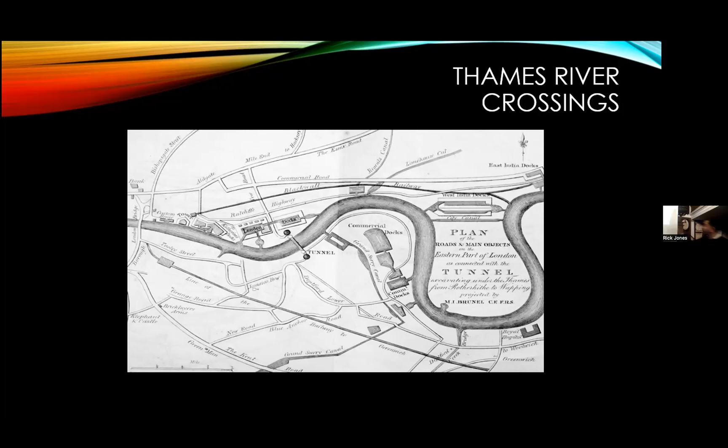Now, sorry, this picture. You can see how congested it was. So something had to be done. Now, this is Marc Brunel, and Isambard is his middle name. Marc Brunel was actually a world-famous engineer in his own right. Nowadays, everyone remembers Isambard because he did significantly more during the Victorian era.

Now, Marc Brunel was a royalist. And during his lifetime, he escaped from France because people were chopping heads off for being a royalist. So he escaped to America. And while he was in America, he became the chief engineer of New York City. Then he eventually came back to Britain and started working for the Admiralty.

And he was one of the first creators of the production line. The Admiralty had loads of ships, and the ships needed wooden blocks to hoist the sails up. At that time, it was very expensive to build these wooden blocks because they needed skilled laborers. So Marc Brunel came up with an idea of how you can use unskilled laborers to make the wooden blocks, and then at the final stage, a skilled laborer checks the quality and makes any adjustments. That saved a huge amount of money for the Navy.

He also invented army boots because he realized the army boots the British were using weren't good enough, and he made his fortune doing that as well. So where did Marc Brunel get his idea from? He got it from this. It's called a shipworm, and the name is a bit of a misnomer. It's not actually a worm at all. It's a clam. Anywhere in the world, especially in the tropics, these worms are known to sink ships and destroy piers.

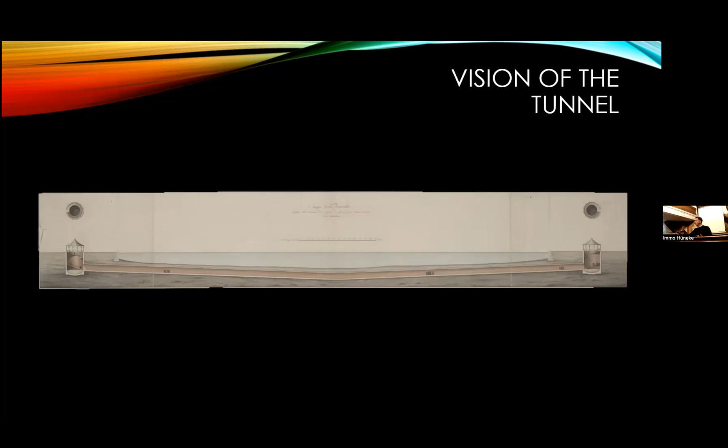If you look at the previous plan, you can see how close the river is. So digging under the river is always going to be problematic. If you ever go to the beach and you put your foot in the sand, you lift your foot up, the side slopes, the water comes in. That's the problem they had here. So using the normal shoring up with wooden platforms is not going to work. So what they ended up doing was they created this ingenious thing, which is called the main chamber. But what it really is, is a giant pastry cutter. During the pandemic, a lot of people have been baking cakes, so that's why I use the analogy.

So the bricks weren't actually created there. There was no direct digging. What they did was they built the cylinder at street level. It's 50 foot in diameter. They put a metal ring at the bottom. The metal ring on its own weighed 25 tons. They put another metal ring on top, another 25 tons, and they put a steam engine to pump the water out. And the whole contraption weighed 1,000 tons. And they let it sink by gravity. So there's no direct digging.

Now, even though Marc Brunel started the project, Isambard took over. Isambard took over incidentally, because there was supposed to be another engineer, but that engineer fell ill. So Isambard took over when he was only 19 years old. And you can imagine what 19-year-olds are doing today. They're probably updating their socials, not building tunnels under the river.

And when Isambard took over, one of the things he noticed was that since there was no direct control of how quickly the shaft sinks, some days it sank by inches, other days it wouldn't sink at all. One instance, it didn't move at all for days. So Brunel instructed the bricklayers to put another 8,000 loose bricks on top. Similar to what you do at home: if you can't get the pastry cutter to cut through the pastry, just give it a bit more oomph. Nothing happened. He then said, let's go all out. Let's put another 50,000 loose bricks on top. Let's not mess around. Again, the chamber was steadfast, didn't move at all.

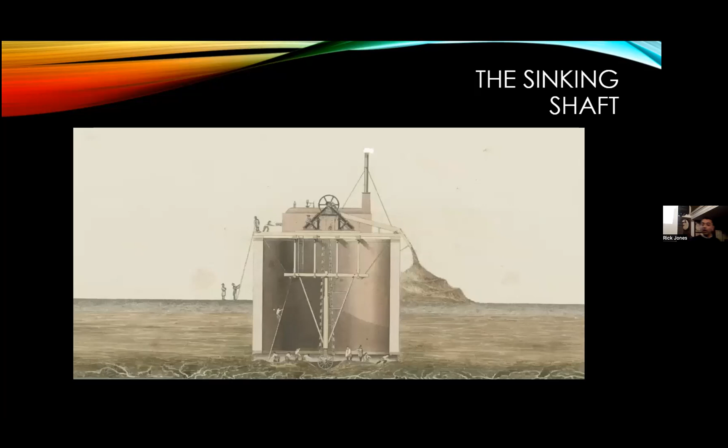Now, this actually shows the tunneling happening. So once the chamber, actually, if I go one slide back, once the chamber had been sunk to the required level, they built the floor. They actually built a reservoir to capture any rainwater and obviously cope with the water table in there. And then they lowered the shield in sections and started digging through towards the river. You can see the shield in situ and the bricklayers working.

Now, the more observant would notice there were no animals used. And the reason why no animals were used is because in the 19th century, the River Thames was the biggest open sewer in the world. Okay, and as people come across the big stink, yeah, so this is when parliamentarians can get their butts in gear and do something quickly.

In 18 days, they passed a bill to build a pumping station to get the sewage out, because in the late 19th century, there was so much heat in London, hardly any rain, the riverbed went really low, and the parliamentarians couldn't even work. And there was a plan to actually move Parliament to Hampton Court Palace, but that didn't happen. So you can imagine what working conditions were like.

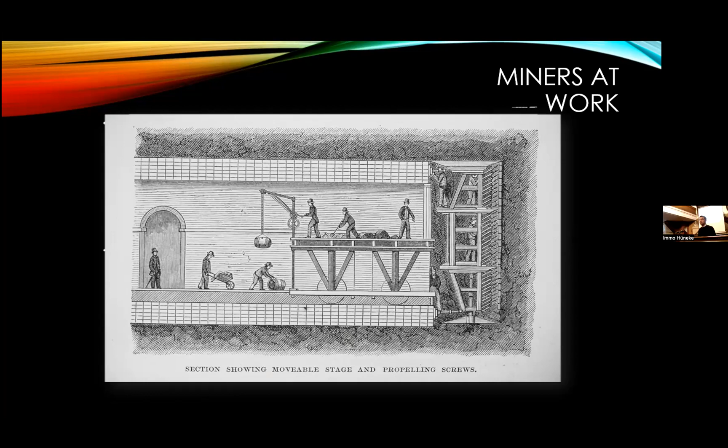The workers themselves did 2-hour shifts. Even the engineers who would go down just to investigate the progress of the work would also fall ill after like 20 minutes because the fumes were toxic. So no animals would actually survive down there. Okay, so that's why no animals were used. So everything was done by manual labor. So you can imagine how harsh the conditions were.

Now, obviously there was flooding. Okay, the first flood happened in 1827, 2 years after the building started. One of the bricklayers noticed that while he was working, there was a lot of seepage coming in. And this was a surprise to the engineers, because before they'd started digging, the engineers did some test boreholes across the River Thames. And what they were supposed to get was 15 foot of mud. Now, mud is waterproof. But what they instead got was shingle. And shingle leaks like a sieve.

And this particular flooding almost took Isambard's life. Because Isambard went to investigate to understand why the leak was happening, and the tunnel breached. Water came gushing in, and you can imagine both tunnels being flooded, including the main chamber, full of sewage water. Isambard wasn't able to escape using the normal route to get out, the platforms collapsed, and his foot got caught in the scaffolding. But the torrent of water was so severe, it pushed him out.

And he got pushed through the tunnels into the main chamber, and he was actually rescued from the original tiny door that led to the main chamber by a worker who was going past. Now, it could have been any of the other workers there, but it was actually Isambard, this sort of body floating at the top. He was dragged out, and he was described as being half alive and half dead. Now, he went to recuperate in Brighton, and then eventually in Bristol, where he got involved in the design of the Clifton Suspension Bridge.

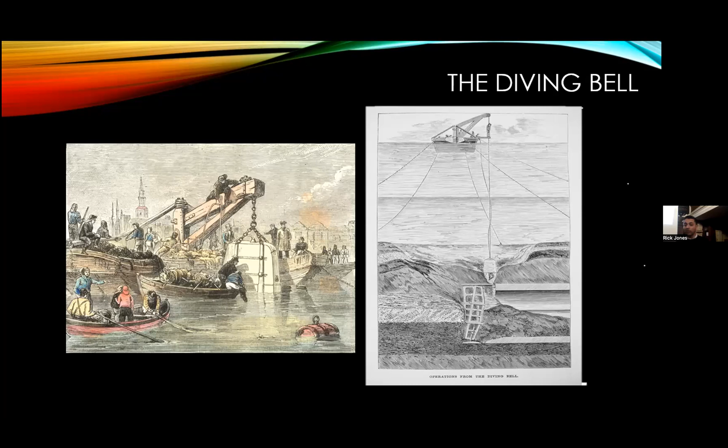They will investigate, then they will pump the water out, clean the slurry, let it dry, and then continue the work. So months and months of delays at huge expense. And that's why the tunnels, not surprisingly, took 18 years to finish. And you can see on the left-hand side, this is a better picture of where they've used mud sacks to support it. And there is actually a guy there on a little boat going in to inspect the damage. There were 5 major floods and smaller leaks in between.

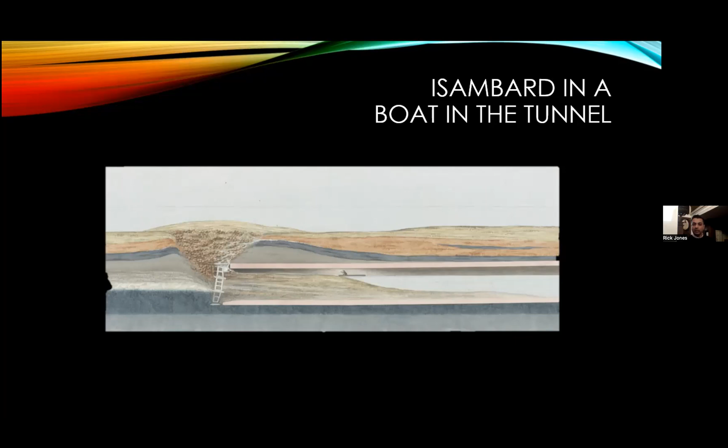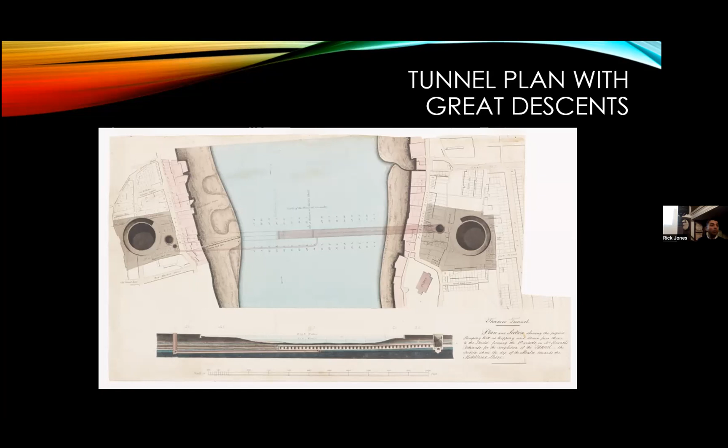Okay. Now, this shows one of the plans when the tunnels were boarded up because they ran out of money. So there's 7 years where no work was being done at all. They got to about 2/3 of the way and then had to essentially give up. And they had to try to raise more money because the tunneling company was almost bankrupt. And to raise money, they did this. They had a banquet to show people that the tunnels were safe.

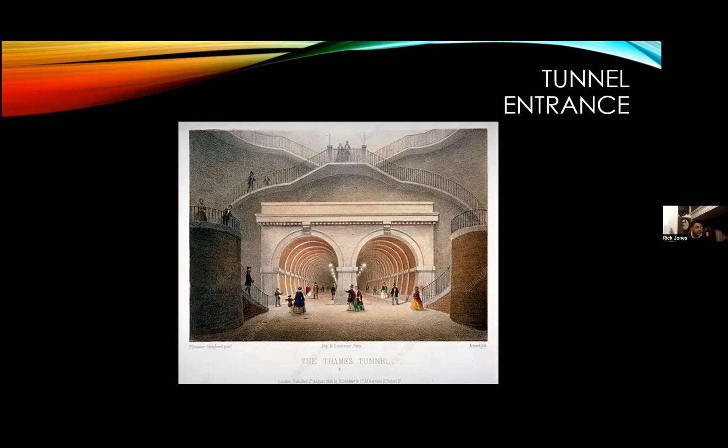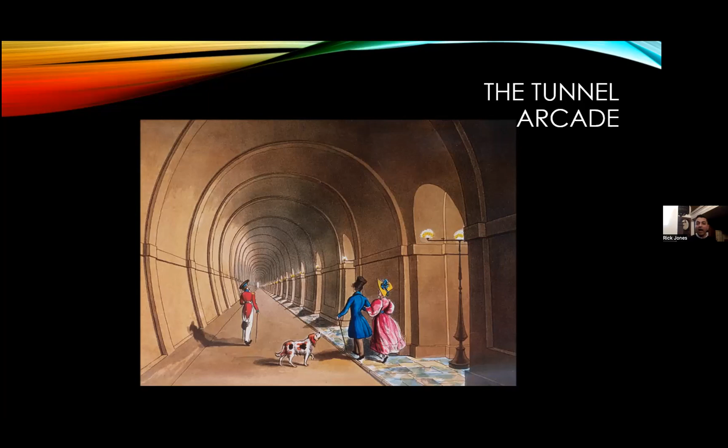Now, at that time, traveling was very expensive. So only the rich and wealthy got to travel. So in the tunnels themselves, they actually had hung murals of paintings. They had the Bay of Naples, Dover Castle, Hampton Court, and basically this was just to show how the gentry lived and what they visit when they go on the grand tour, which a lot of people couldn't do. It's just like boarding an aircraft. Yes, exactly, exactly. And this was enough to raise extra money for the tunneling.

Okay. Now the economics of the tunnels. Now, after a number of years, the main problem with the tunnels was that they should have been built for commercial traffic, and that never happened.

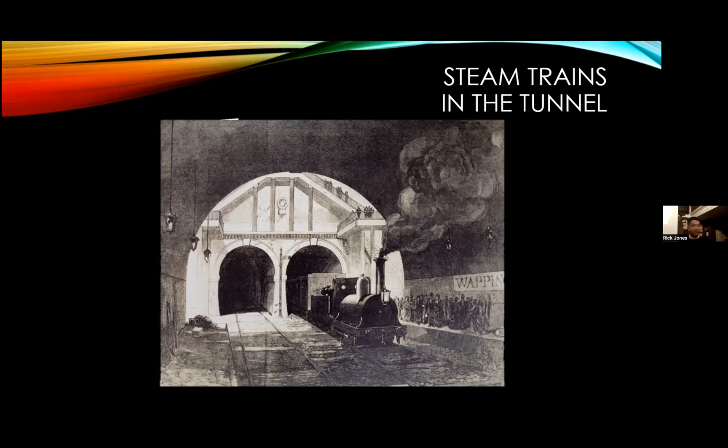Now, before TfL opened it for the overground network, they did some archaeology, because one thing they were worried about was ruining or destroying something which was on the tunnels. As I mentioned before, they thought there were painted murals, mentioned a few times in newspapers. And TfL was concerned that some of those would get ruined before they tanked the whole of the inside of the tunnels. When they did an investigation, they only found essentially white lime wash and lime mortar. Because obviously hung murals were more apt for underwater, because the walls were always damp, so you couldn't really paint on them. And those hung murals have now disappeared.

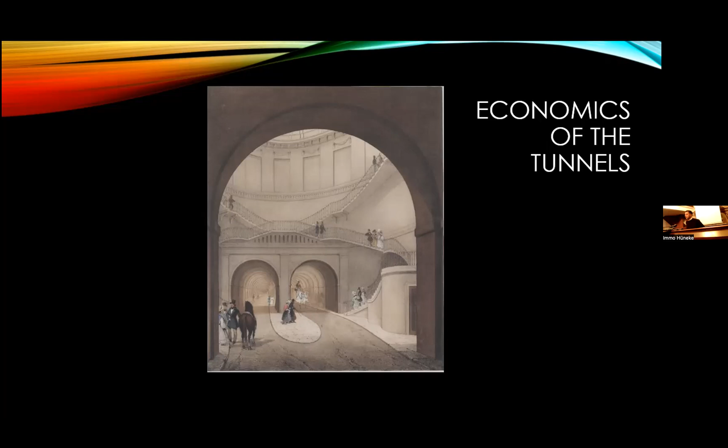Which you meant? Oh, you meant this one? This one, yeah. So this obviously is big. Sorry, the question was whether the tunnel was finished in state. Are you talking about this one, or are you talking about some of the other ones?

Oh, with the flood. Yeah, because this wasn't quite finished, but the bricklayers could only work to the speed of the shield moving forward. So they would actually plaster with lime mortar and lime wash the tunnel as it went through, because they were doing nothing else. If there's any flood or leak happening, they can't plaster at all because it would just fall off. So they'd have to wait for everything to be sealed. They were essentially using the workforce to continue working on the tunnel when they needed to.

No, it is like that. Yeah, exactly. So if you go into the tunnels now, a lot of it's tanked with grey, but I think there's about 20 or 30 meters which TfL has kept the original white. Every now and again, on special occasions, as the train goes through, they'll light the tunnels up so people can actually see. If you go on the trains, you don't see anything, it's pitch black. But on special occasions they light it, and there is that section there. Yeah.